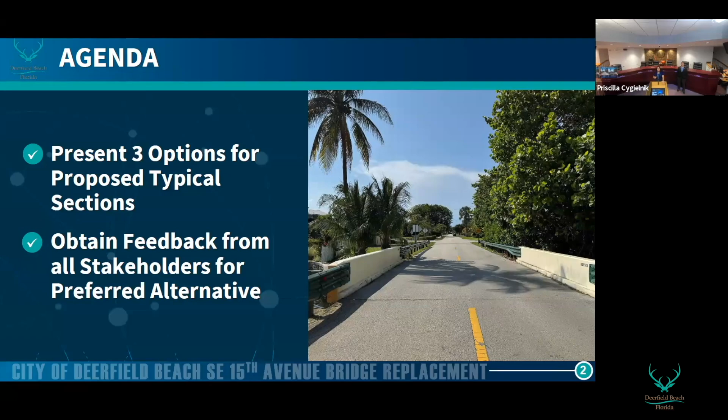Can you keep that up there for a second? You'll see a photograph of our existing bridge. I do want to point out a few things in this photograph while you're taking down this information. You see the seawall - it's a rock riprap wall, and it's significantly degraded adjacent to the bridge. Part of our scope tonight is not just the replacement of the bridge, but addressing that seawall within the limits of what the city owns, the city's rights of way. We can't go beyond the city rights of way. Private property owners are responsible for the walls adjacent to their properties. The city has responsibility for the seawalls that are constructed within our city's rights of way.

Next slide. Here's the location of the bridge: Southeast 15th Avenue between 6th Street and 7th Street. As I just indicated, what we're showing here in plan view is the existing bridge to be replaced, as well as the concrete seawall replacement. Next slide.

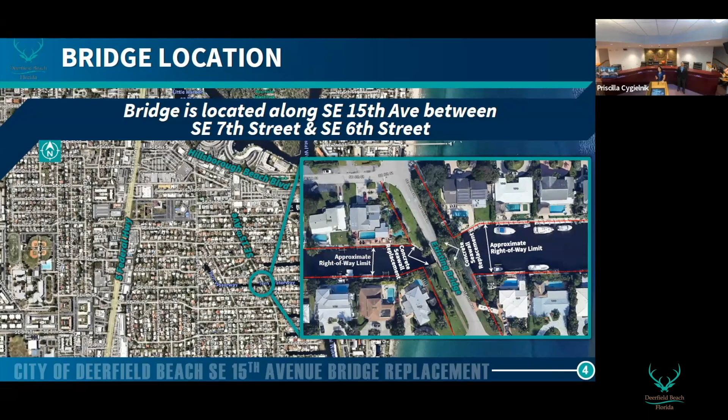So the reason that we're here tonight - this bridge undergoes annual inspection. The state is responsible for looking at every bridge in the state, assessing the condition of these bridges. On an annual basis, we get a report for this bridge. Most bridges, it's every 2 years, but this bridge in particular is every year, because of the deficiencies of this bridge. In the past 2 years, the superstructure has come back with an NBI rating of 4, and that automatically triggers replacement.

At that point, once you get a 4 rating, you start getting phone calls from FDOT asking what's your plan for this bridge. I've been getting those phone calls for 2 years now, and at that point when I started getting the phone calls, that's when we went out and solicited consultants to look at replacement for this bridge. We have funding in place, we have consultants on board, we have our consultants now in place. Now we're going to start the design with your input.

So here's the information on our bridge. It's functionally obsolete - I mentioned briefly what that means. It means that the deck geometry, the width of this bridge, does not meet today's standards for bridges.

Deck NBI is fair, the superstructure is poor, the substructure is fair. We have a sufficiency rating of 15.6. That's really bad. Anything below an 85 is not good. The health index is 58.

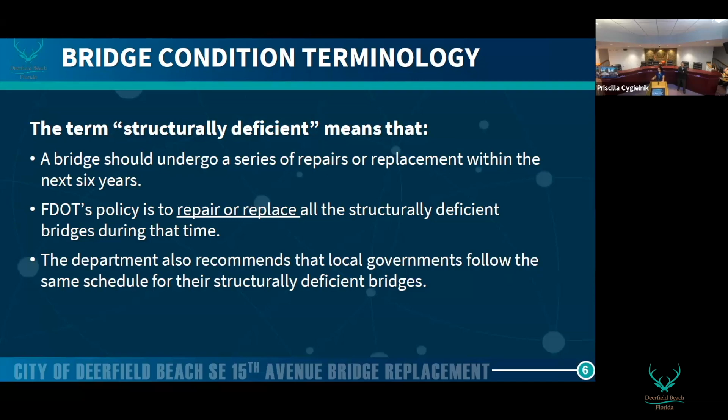Functionally obsolete means it does not meet the road design criteria. The health index is a tool that measures the overall condition of the bridge—a health index below 85 indicates that repairs are needed. The sufficiency rating is also a tool used to determine whether a bridge is structurally deficient, functionally obsolete, and should be repaired or replaced.

As I indicated, our indices and ratings are very low, which indicates replacement. Beyond repair—it's not a condition of repair, we're definitely in replacement.

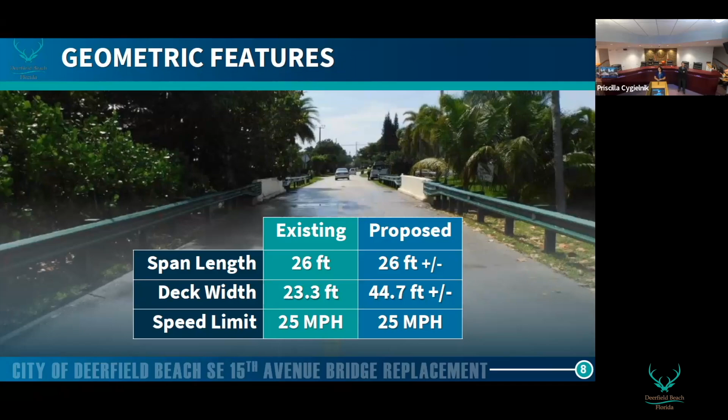Where are we right now? So we've just retained TranSystems, who's our engineer of record. They are preparing the bridge development report. But before they can proceed with the design of the bridge, we need to know what this bridge is going to look like—what amenities, what are we asking the community that they want for this bridge. That's why we're here tonight, for them to be able to complete their bridge development report.

That bridge development report feeds into a permit set of drawings that gets submitted to our jurisdictional agencies. Now, the city does not determine the elevation of the bridge. The jurisdictional agencies that determine the elevation of the bridge are set by flood maps, the FEMA flood maps. So the lowest chord member—meaning the lowest elevation of that bridge—needs to be above the flood elevation.

For bridges, typically those are considered critical structures, and they use the base flood elevation plus 2 feet because it's a critical structure. So typically that's the criteria that we fall in, and we cannot be below that. That's the minimum criteria that's set for flood.

So that we're not creating a hardship upstream, we're creating flooding by creating a bottleneck downstream. That's the whole purpose of floodways—making sure we're not creating the bottleneck and flooding your neighbors upstream. So we do have to maintain the floodways, ensuring the elevation of the bridge meets the flood elevation criteria and that we're meeting the design storm requirements.

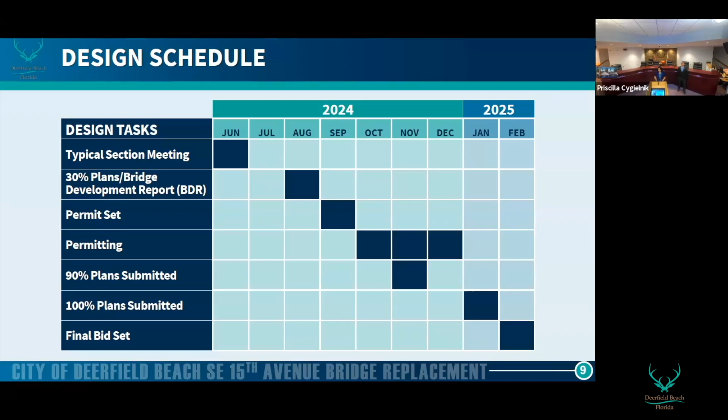Once we have a completed construction set of documents and all permits are in place, it's to put the documents on the street and go to construction.

Construction is being planned for funding in fiscal year 26. Fiscal year 26 begins October 1, 2025. That would be the earliest that we would possibly have the financing and the funding in place to fund the replacement of this bridge, and today our estimate for this bridge is $2.3 million.

It would be an approximation based on what other bridges today have costs of this nature to replace. We are looking at potentially 14 to 18 months of construction for its replacement.

During the duration of construction, we will not have a bridge in place. It will have to be demolished and we'll have to use our detours.

So the city has done repairs to the 13th Avenue Bridge. We replaced the bridge deck entirely on the 13th Avenue Bridge. It's a 3-minute detour to use 13th Avenue in lieu of 15th Avenue. So that 13th Avenue Bridge is going to be the detour, as well as 12th Avenue should you choose. These are optional alternatives to 15th Avenue during construction.

This is a plan view of what that impact is and what that looks like within the existing city rights of way. As mentioned, the city right of way in this location is 80 feet.

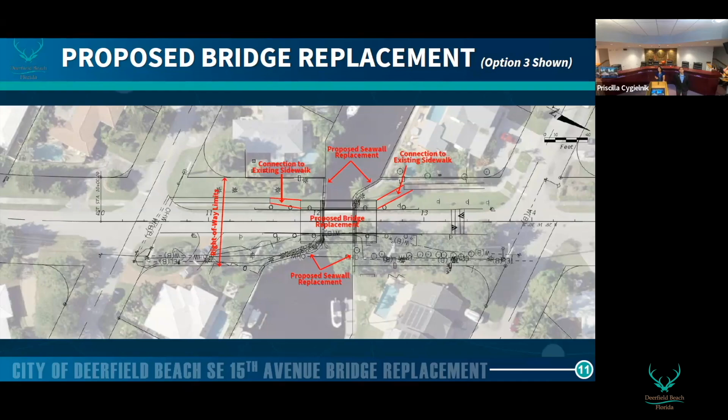So option 1 provides accommodations for both, but separated accommodations. You would have a separated bicycle facility and a separated pedestrian walkway on both sides of the bridge. This is kind of standard, typical construction.

The bike lane has the benefit of increasing the clear zone, so it provides a little more comfort if you're a pedestrian on the sidewalk. It provides a 4 to 5 foot wide buffer between where the vehicles drive and where the pedestrians are walking, and it also accommodates a dedicated lane for bicycles in each direction, north and south.

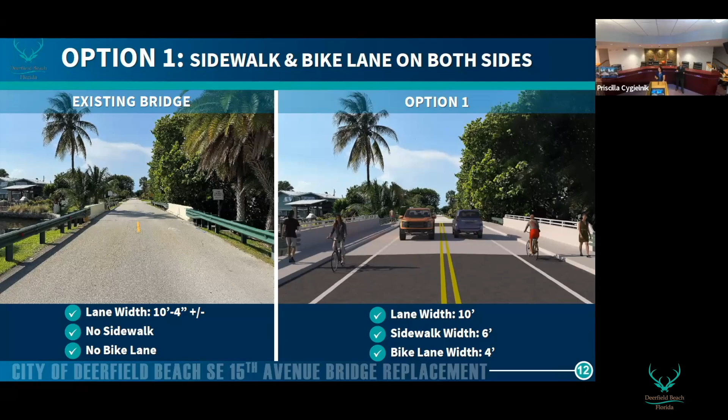Option 2, again you see our existing bridge on the left, option 2 on the right. Option 2 on the right shows a shared use path, with the west side as a shared use path and a sidewalk on the east side. The benefit of this is you have an actual dedicated shared use facility.

For somebody who might not be an expert rider and doesn't feel comfortable riding adjacent to traffic, the benefit of a shared use trail is that you can provide an extra wide sidewalk, typically a minimum of 8 feet wide, which allows for joint use by bicyclists and pedestrians.

The reason shared use is considered a pro is that you're providing both non-expert and expert riders space. Bicyclists, whether expert or novice, would use the shared use facility and have a level of comfort in their own facility. And then the option of having a sidewalk on the opposite side means that if you're a pedestrian and don't want to share the space with a bicycle, you can choose to be on the opposite side.

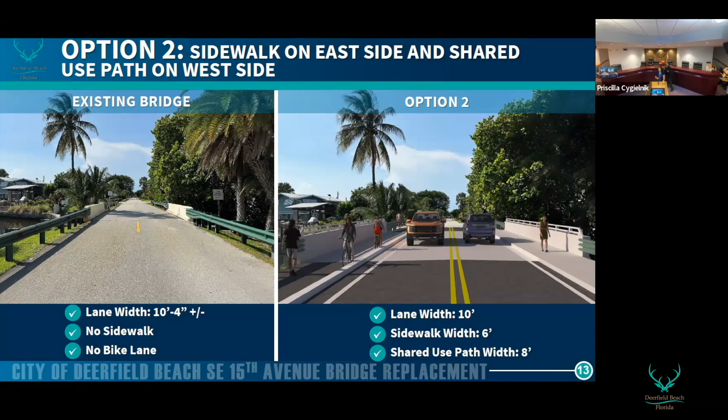Option 3 provides shared use on both sides, so this would be 8 feet wide on both sides of the bridge.

I do want to point out that there is a curb line that protects both the pedestrians and the bicyclists, and also protects the structure of the bridge. So if you're a vehicle, an errant vehicle, and you hit the curb line, that deflects your tires.

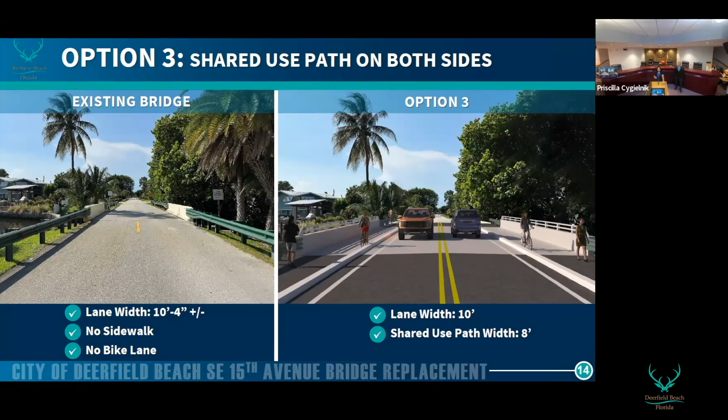Next slide. So here is the QR code that we're providing for folks to submit their choice. As I mentioned, tonight we're not asking for a final decision on these, but we are providing the QR code, and what we want folks to do is we're going to open up our survey for a period of time and collect the input.

We're going to try to make as democratic a decision as possible, because either of these options meets the need of the future for the bridge and to accommodate users. So what we're looking at is meeting needs for vehicles, for emergency vehicles, for pedestrians, for bicycles. The intent here is that we're accommodating the needs of the future.

I'm going to go ahead and turn it over to our design engineers, and I know you have a bunch of questions for them. So what I would ask you to do is, if you have a question, because there are folks on Zoom tonight, and the only way they're going to hear you is if you come up to the mic. So one by one, come up to the mic, ask your question, and I have the design engineers here available to answer your questions.

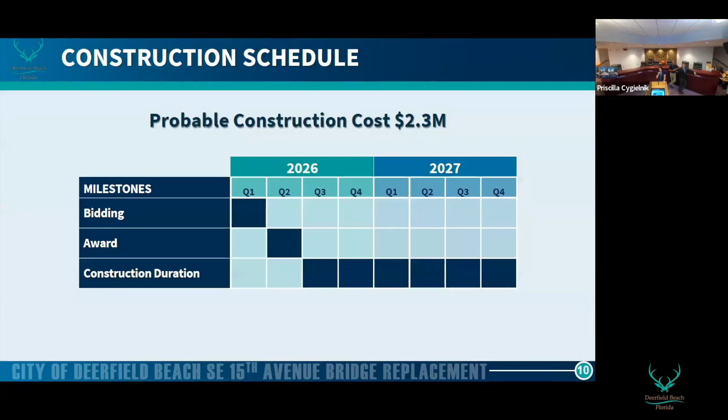Okay, so there's already been a decision made at the city level to replace the bridge, is what you're saying? So the bridge, because its sufficiency rating is 15.6, I believe—we can go back to the previous slide—but right now, because of the ratings of this bridge and the health index of this bridge, the option available to us is replacement. We really cannot keep this bridge. It's functionally obsolete, it's structurally deficient.

Okay, and so then the city has no discretion whatsoever as to whether or not to proceed with it? Well, replacement is needed if it has exceeded its useful life. This is what he asked—I'm asking if there's any discretion. Does the bridge have to be replaced? That's the question. You didn't have the money—so we didn't have the money to replace the bridge before. We do now, and I think it's in the best interest of everybody to replace the bridge.

But how that bridge looks is why we're here. And what I'm hearing is that these options are meant to try to bring as much multimodal transportation across as possible, not vehicle traffic. I've heard comments about, well, we're trying to do this to the bridge so more vehicles can come through. We're not changing the footprint of vehicular traffic of the bridge.

What I am hearing—at least from this crowd—and I think it's going to be important to put the survey out and see what it looks like. I'm hearing from this crowd that you'd like to also see an option that includes just one sidewalk, or alternative mode of transportation—we'll call it shared use path, whatever that may be—on one side. And I think that side would be on the west side, right? Okay.

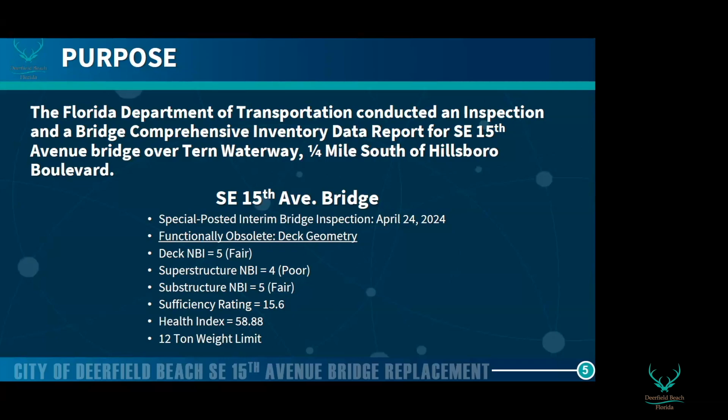So it's less out of your pocket, and we've got people in the panhandle helping us pay for this bridge type project. So I don't want anybody running away saying, oh, we're not using your tax dollars. Of course we are, but it's a much smaller percentage when you get state appropriations.

The whole point of this is to get input from everybody to determine what we want. And I think the general consensus seems to be, do have as little impact as possible when doing this. What we don't want, after 40 years of being lucky with never having an incident, is somewhere down the road, because we didn't put in an ability to cross, someone has to go out into the street. And we didn't do that if something does happen.

We don't want to ever be in that scenario. And while a 40-year track record's pretty good, we certainly want to make sure we've done everything we can to keep people safe, but we want to do it with the least amount of impact on the residents that go through that bridge, which are the majority of all of you who live over there. So I think everybody's passionate about this, but this is about giving us some idea of what direction you want us to go in, and I appreciate you guys coming out and partaking in this.

Anyone opposed just removing it? No. It's part of the whole ambience. Ridiculous. Was there anybody else online that wanted to speak? No, I know that this gentleman, I'm sorry, was that a yes or no? Yeah. No? No, that's okay.

And I know that this gentleman wanted to speak as well. Yeah, you kind of answered. My name is Chris. I live on the corner of Southeast 15th Ave and 8th Court, or 15th Ave and Southeast 8th Court. And everybody kind of answered. I mean, the option 4 that everybody's talking about seems to be what we all want to go with.

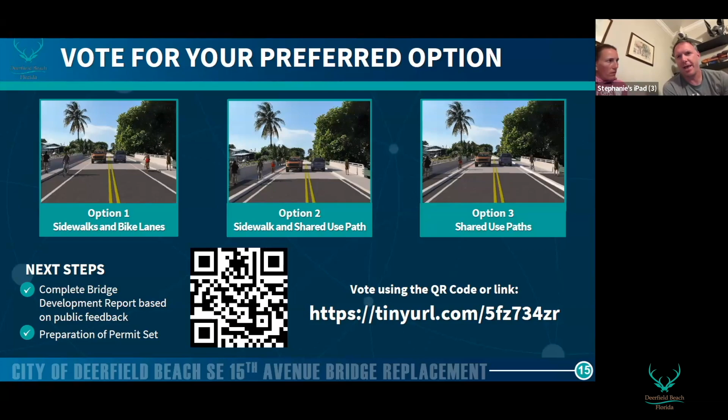So yes, I think what I'm hearing is that we'd like to see an option that only shows some kind of sidewalk or shared use on the left. I'm looking at the bridge, so my left is west. On the west side, and that it meet the minimum requirements for that type of use, and that would be it. Fantastic. And definitely connect, because on both sides of the bridge there's those kind of sidewalks to nowhere that we have. That'd be great if those actually were usable.

On north and south side, you're saying, of the bridge? Yeah, on the west side. And that's all we don't have.

Okay, so I'll take it from here for a minute. My name's Sean Slattery. I live at 5th Place and 15th Avenue, right at the roundabout there. So I have a couple questions and a couple comments. One question is, is there any plan to widen 15th Avenue and add bike lanes all the way through 15th from 10th to Hillsboro?

It's a lot. Alright, so we're talking about adding bike lanes just for like a 1 block area? Yeah, so a little clarity on what those bike lanes are.

So we have to have a minimum bridge deck width. So it's how do you allocate that additional space on the bridge? Do you allocate it for pedestrian usage? Do you allocate it for bicycles? We need a clear zone regardless of that, okay? So the width requirement is a requirement for clear zone. So regardless, we have to allocate that space for some usage. It could be just a breakdown shoulder, but that's ill-advised because you have pedestrians and you have bicycles. So why not provide an amenity for them since you have to have the width regardless?

So the question is, how best to use that width? Do we call it a shared use path and accommodate bikes and peds with a curb line? Do we call it a sidewalk and provide a raised platform that people walk across the side of? Those are the options we're talking about. But regardless, the width of the bridge has to be what the width is based on standards, and we have to have the clearance on each side to where the actual structure of the railing is.

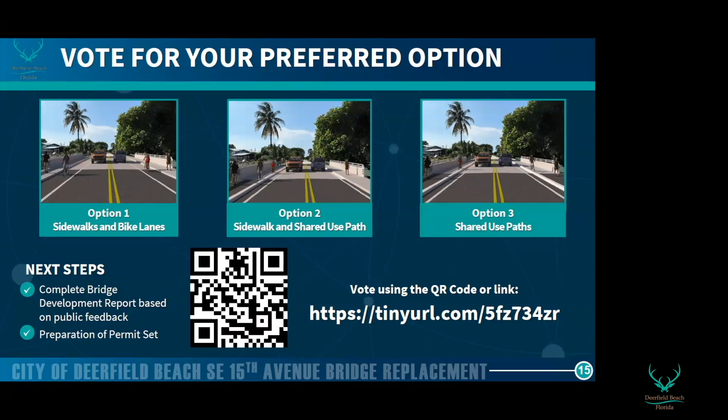No, the bridge is safe for travel. It was repaired because we didn't have the funding to replace it, and it is still functionally obsolete, which means that it doesn't meet today's standards for bridge construction.